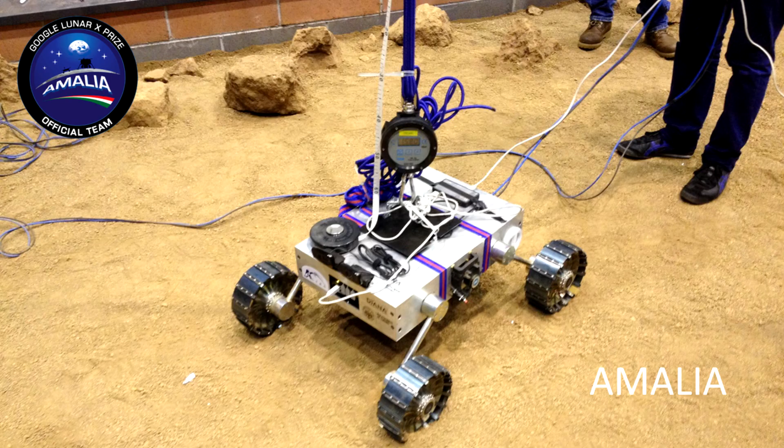So this is a photo of us about 1 month ago in Poland. Up to today, we have completed a total of 4 rovers. The first was Amalia, created for the Google Lunar X Prize - a small lunar scout equipped with a stereo camera just for mapping and taking photos of the moon soil. The project was actually space grade, so the rover cost quite a lot, and there were other sponsors like the Italian Space Agency, Leonardo, and others. It was a good project for the team to start with.

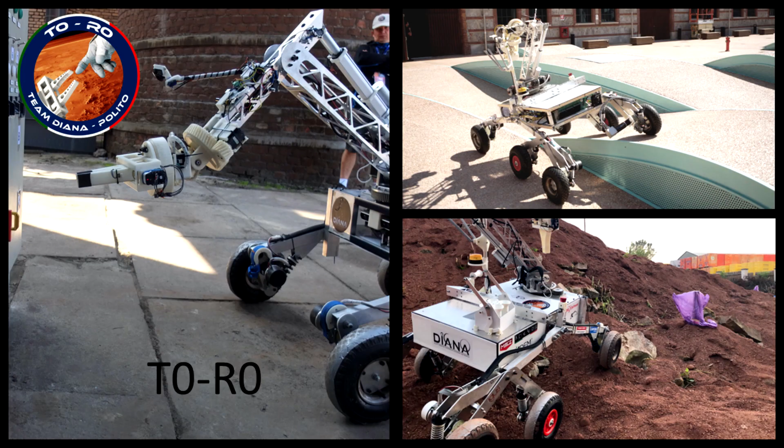But after the failure of the Google Lunar X Prize competition, because Google ceased to continue it, we started developing a rover for Martian environments in order to participate in the European Rover Challenge and the Rover Challenge series. So in 2016, we started the Toro project, and this rover was equipped with a 6 degrees of freedom arm - we have one mounted there, not that exact arm, but another 6 degrees of freedom arm.

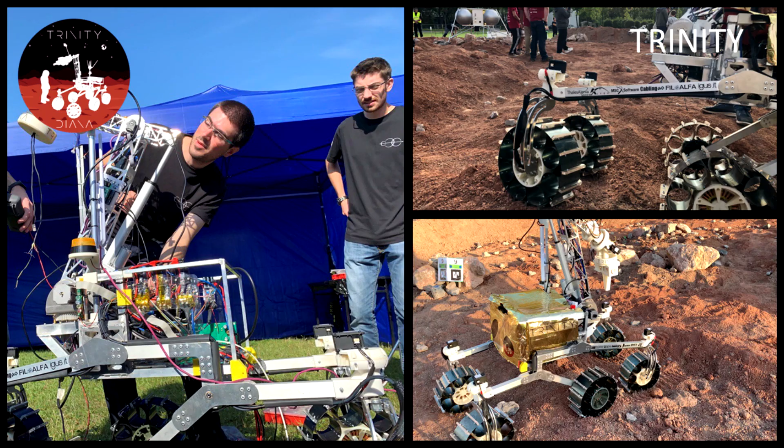This rover was then presented at the 2018 European Rover Challenge. After that, trying to solve the problems of Toro, mainly its steering capabilities, we designed Trinity, our second Martian rover. Trinity had steering wheels and a lot of improvements, but the project was too quick. So just as we came back from Poland that year in 2019, we started thinking about a new version of Trinity, but the differences were so significant that we decided to give it another name.

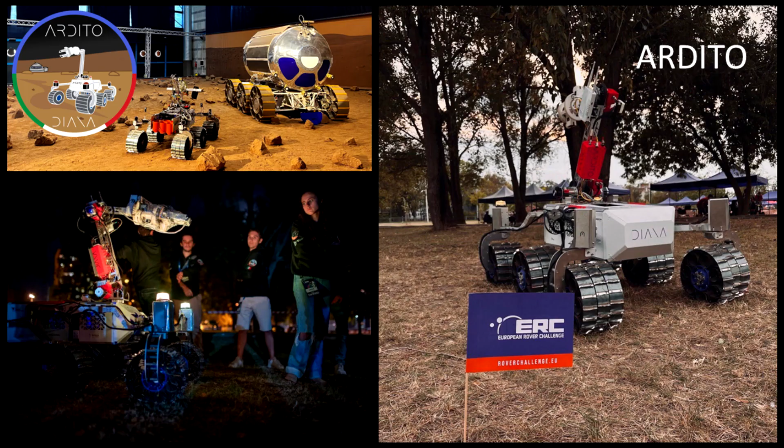So Ardito was born after that. Ardito improves on the Trinity concept, enhancing the locomotion capability and the manipulation capability with a brand new 6 degrees of freedom arm. This project started in 2019, and we are still developing it and pushing the rover forward. So that's a short recap of our history.

So the media design group, for graphics, social media and video editing, because we have to deliver a video for our competitions. The science research group deals with the scientific tasks inside the competition, which Alessandro will explain a bit more later, and Alessio again a bit more. And the management group deals with procurement, keeping track of the work inside the rover and inside the groups and the transversal group - it's like glue inside the team, we hope.

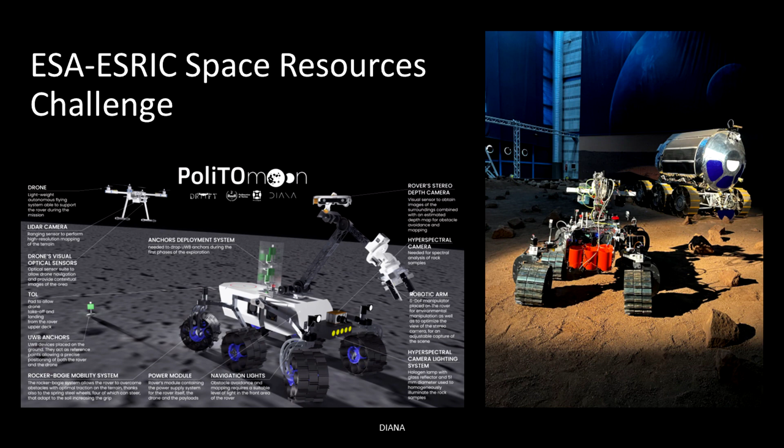Then, of course, a space-grade rover is one thing, and an Earth-based competition rover is another. In general, we try to be in the middle - not too easy, not too expensive, so to say.

And then, as a student team of Politecnico, we also take part in several public events with the goal of promoting our activities, but also the university, and more in general engineering, to do STEM and stuff like that.

And then also, as I said, television events - we were mentioned, and some of us were recorded during an event of Super Quark.

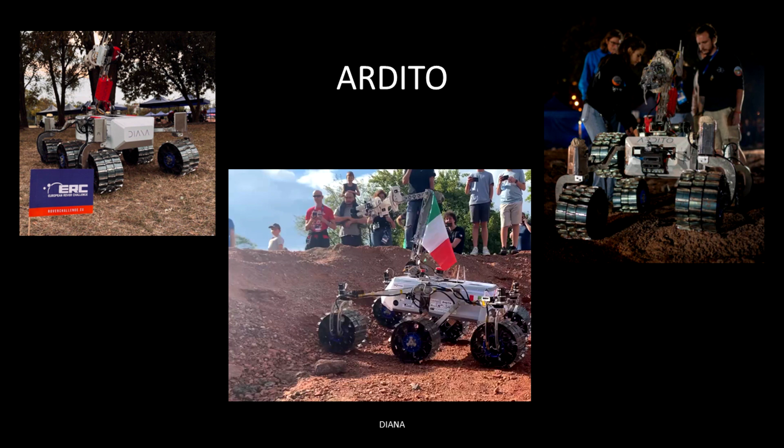Hi everybody, we are Amalia, Mattia and Lorenzo. Me and Lorenzo will be the mechanical leaders for this year. Here you can see our last rover, Ardito. The mechanical department is one of the most numerous in the team, and welcomes students mainly from aerospace and mechanical engineering, but over the years even students from civil, geotechnical and biomedical engineering have been active members.

So any industrial or even material student interested in robotics is welcome in the department.

Now let's talk about our last project, the rover Ardito. It's a robotic platform designed to be modular so it can be adapted to various mission scenarios and future applications. In this slide you can see different mission configurations: on the left, the rover is hosting the UWB payloads for the ESRIC competition, and on the right we have the deep sampling system for the collection task.

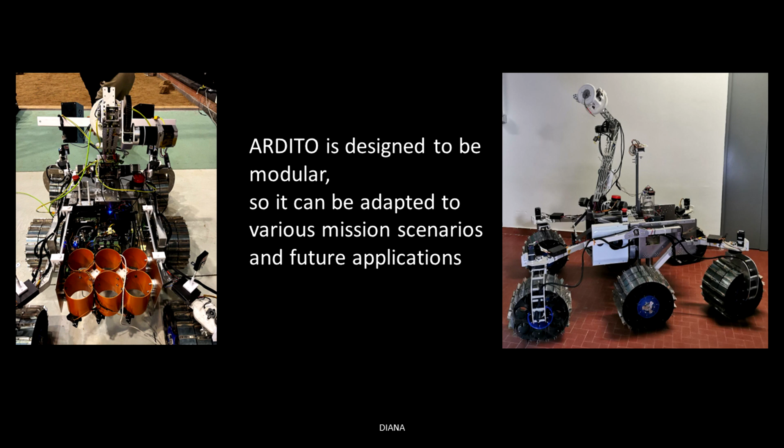The locomotion structure of the rover consists of a rocker bogie terrain mobility system equipped with 6 independent driven wheels, 4 of which are capable of steering. The wheels are made of spring steel so they can adapt to irregular terrain.

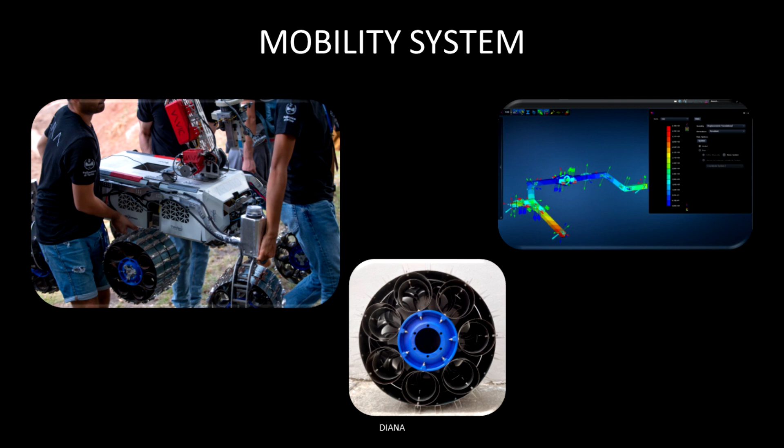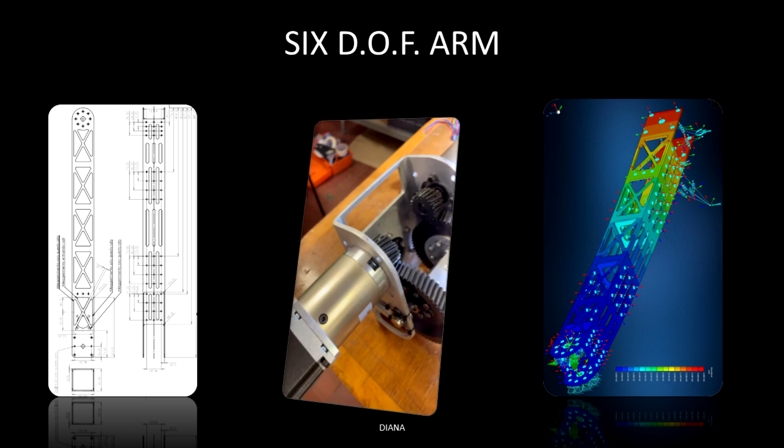The design follows a custom geometry defined using various modeling softwares, adapted to the mission scenarios. The 6 degrees of freedom arm can be extended either in a high position or close to the ground. You can see the assembling part here, and we have a short video of the arm fully assembled.

It can be mainly divided into 2 parts, the structural arm and the wrist. The arm, as you can see in the video, is also equipped with internal ribs connected to the structure with rivets that prevent deformation at the weak points.

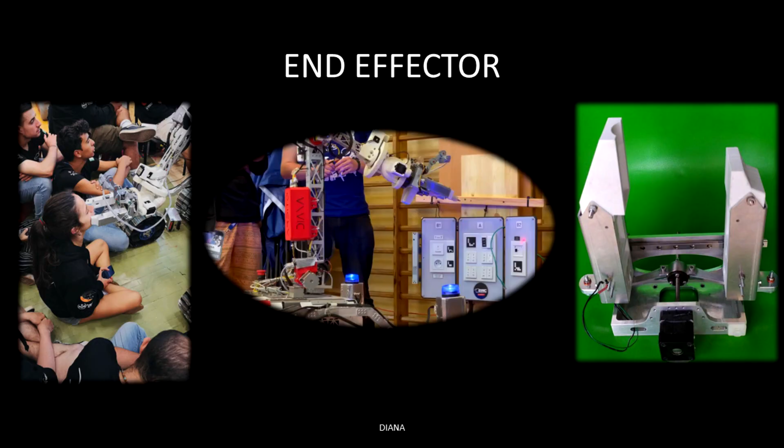The end effector that is on top of the robotic arm is the hand that we use to execute the maintenance task.

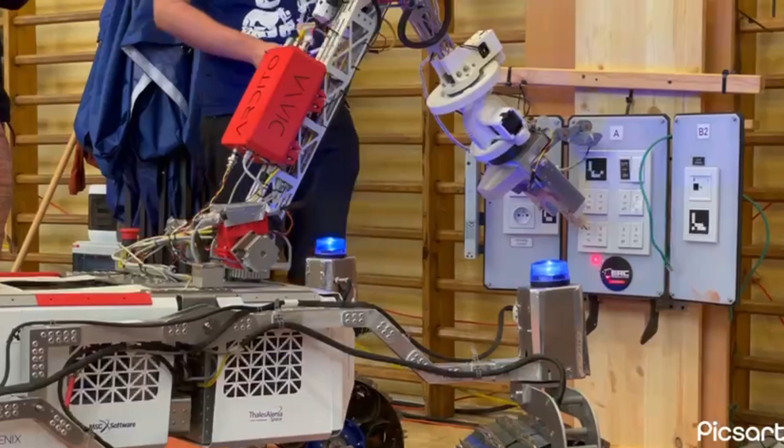The end effector is also designed to be modular, and because of the difficulty in creating such a performing system, different fingertips were made to accomplish each subtask. In total you can see on the right 2 fingertips made for the maintenance and probing tasks. Now I leave the microphone to Lorenzo.

Talking about modularity, as Amalia said, Ardito can be equipped with different systems, such as a deep sampling system, and also the power and avionics module can be changed to let all these payloads fit on the Ardito structure.

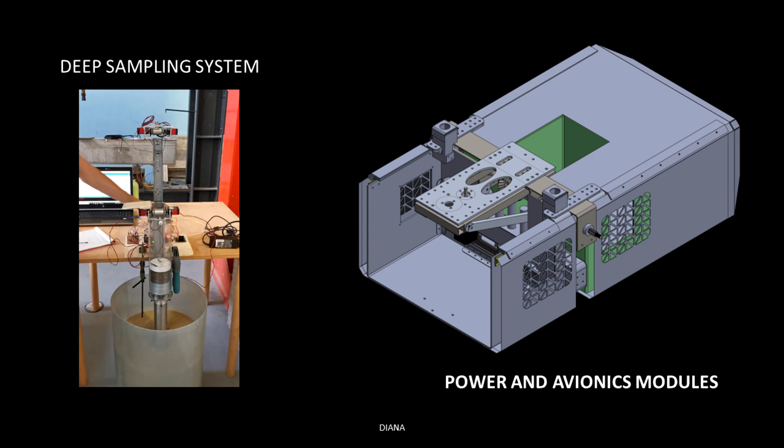Here we have the differential system. This is the actual differential, and this is the future one, placed under the chassis to connect the 2 mobility systems. It's formed by 4 straight bevel gears and 2 spline shafts, and it lets Ardito move.

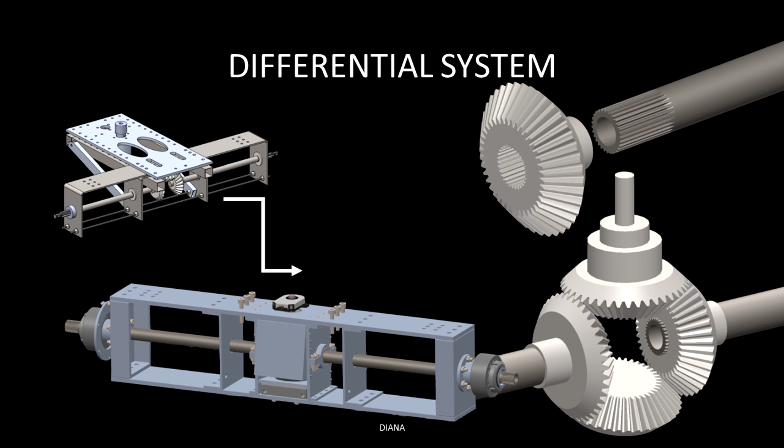Also, during the year we have a production phase, where we do the production sheets and communicate with the companies that will produce our pieces.

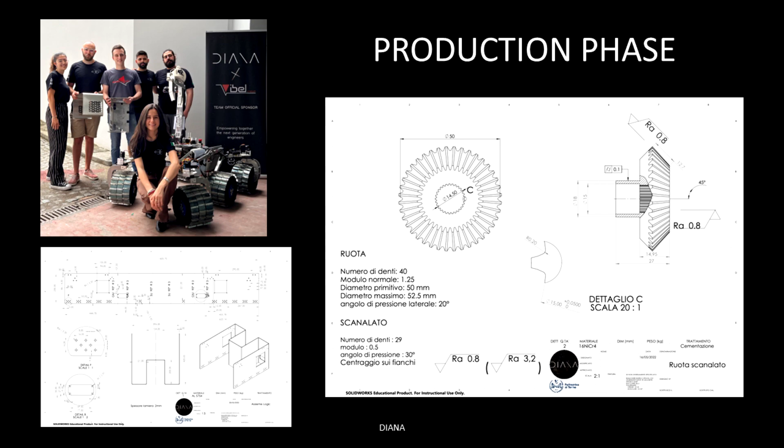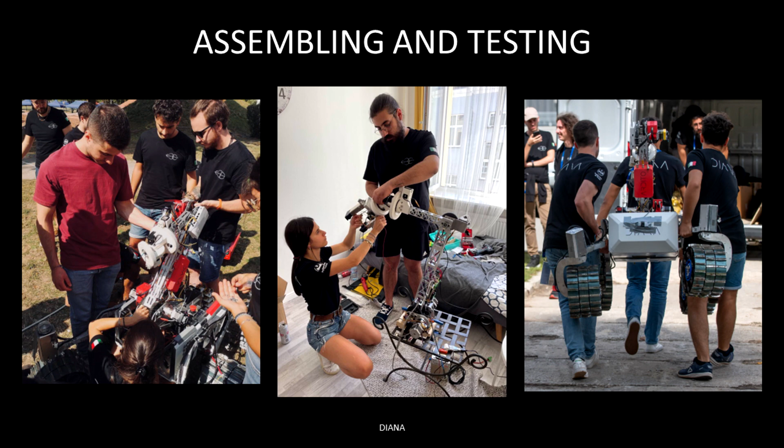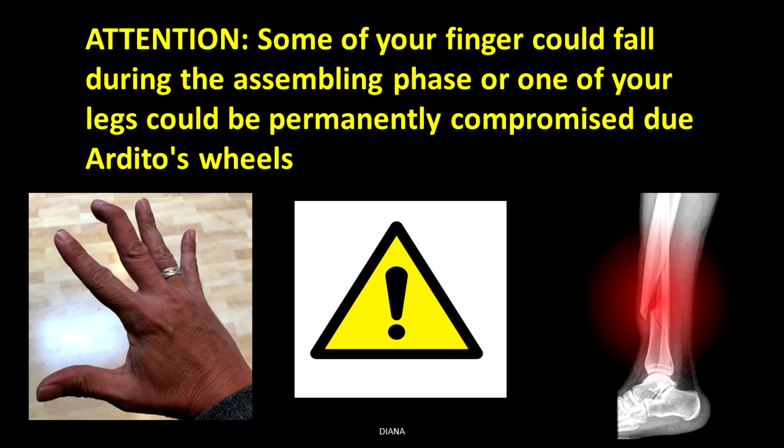Hello everyone, so now I'm going to give you a brief introduction to our two transversal groups. We have basically two of them: the analysis group and the CAD division.

Using MSC software like Nastran, Apex, and ADAMS, all of them from MSC company, because we really love them. The analysis division has a lot of color, but that's all.

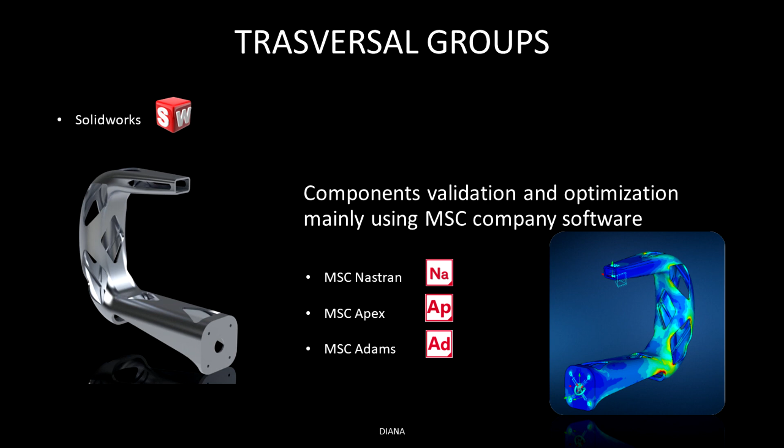And then with the multi-body analysis, we can create... okay, this is the video.

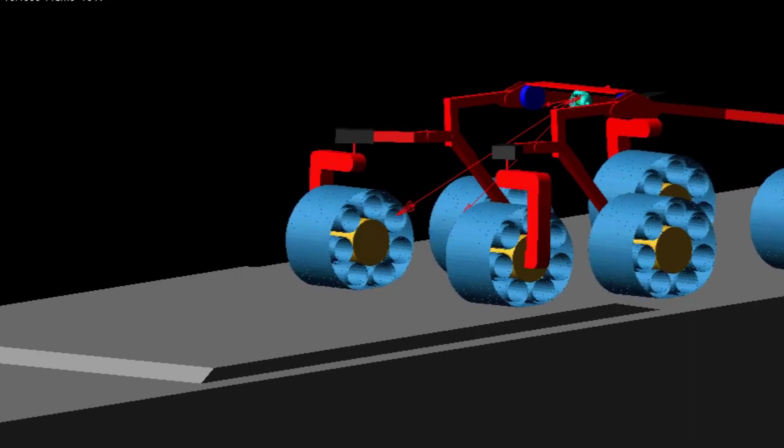It's really helpful to us to understand better the physical setup, the physical environment where the rover acts, and understand better the forces, the moments, everything about the physical environment that you have to take into consideration also for the dynamic analysis and other analyses.

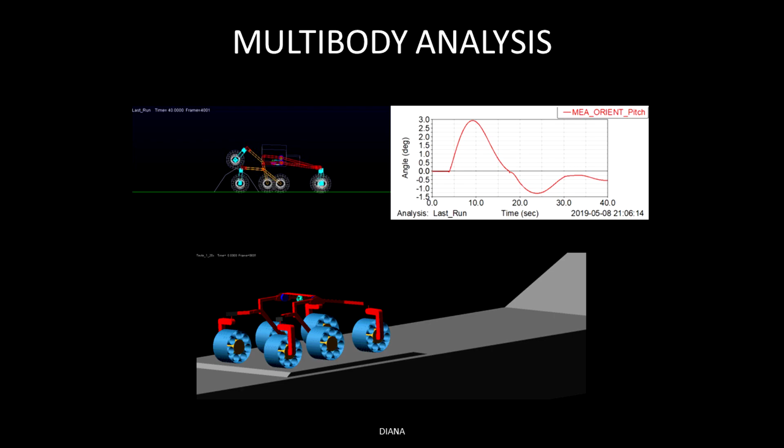So the base of this part is that we have to create components that we can use for the rover. We can start from a concept on SolidWorks, try to get some shape, and then you have to validate with Apex, doing a continuous iteration between the CAD software and the analysis software, to create a final model and final results to give to the production phase and send to the company to produce them.

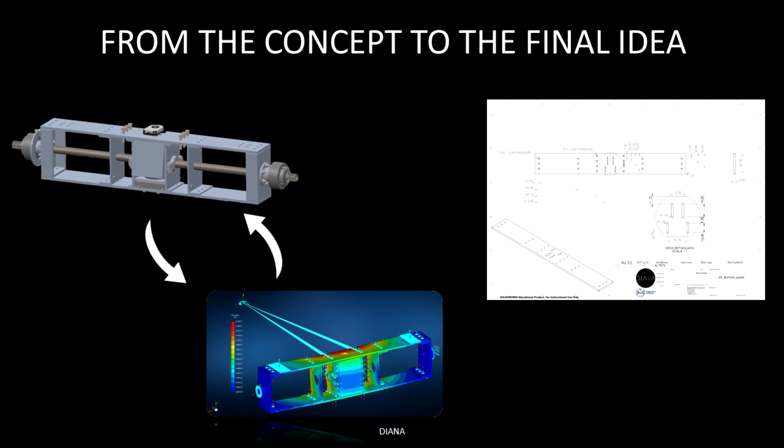So basically this is a brief introduction, and I'm going to leave the speech to the electronics division.

Can you hear me? Okay. Now we will speak about electronics. I'm Giacomo, the co-leader of the electronics department, and I work on the hardware part of the electronics.

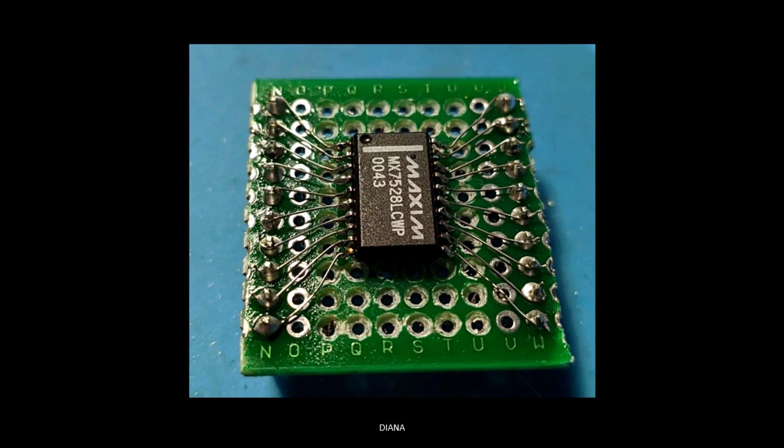One of the biggest parts of our work is the PCB design and production, because almost all the PCBs are made by us. The first part of the PCB production is the hardware design and development. We use software like KiCad and EasyEDA, and probably this year we would like to start using Altium thanks to the student license provided by the Politecnico.

These are, for example, two boards, the schematics of two boards that are mounted on the rover.

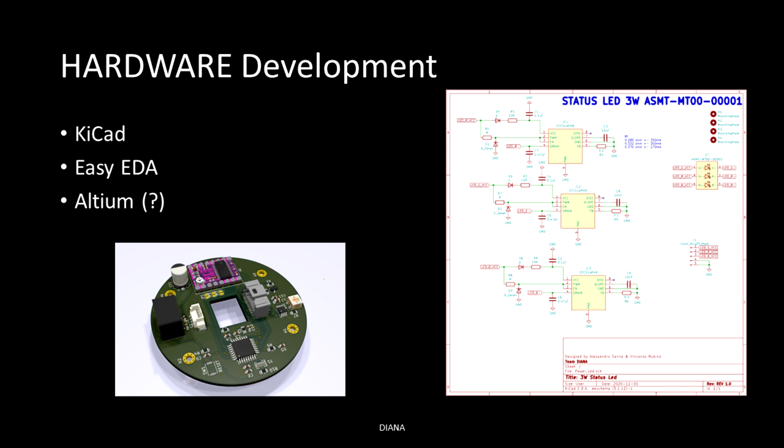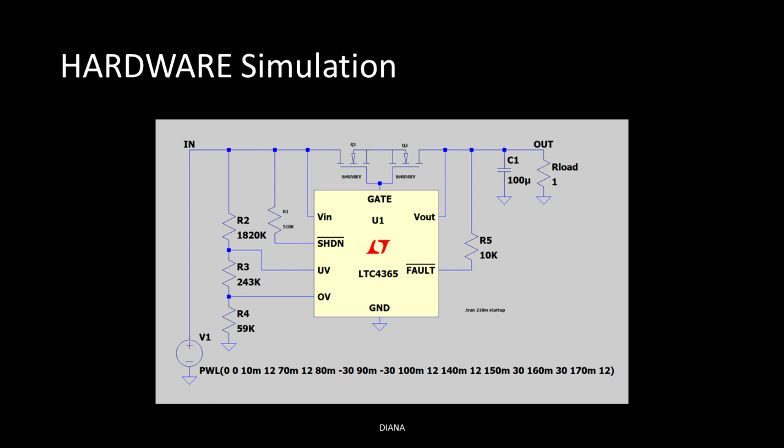Some PCBs need testing before production, and to do this we use software like Spice to test them before sending them to production.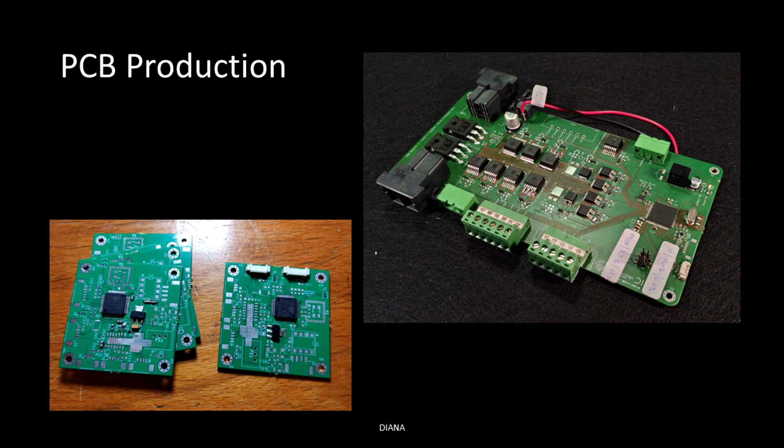The last part is the effective production and assembly, and we do this in the lab. These are other boards that are mounted on the rover. This one, for example, is mounted on the steering, and the other one is the power control board that controls the power from the battery to the rover.

Another work that we do is the cable management. This, for example, is the junction box, a box full of cables that is mounted on the rover and gives modularity because it's full of connectors that can be connected, so we can detach all the electronics from the rover.

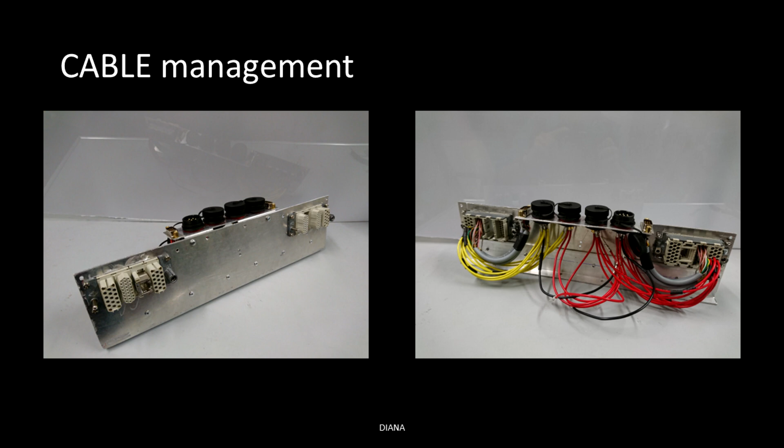Now I will give space to Nicola, who will speak about firmware. Hello everyone, I'm Nicola, I'm the co-lead of electronics and I work on the firmware.

The firmware department deals with writing the code for various ARM microcontrollers, either bare metal or using real-time operating systems. Right now we are working mainly on STM boards from ST Microelectronics, and the two boards we have on Ardito are based on H7s and F4s.

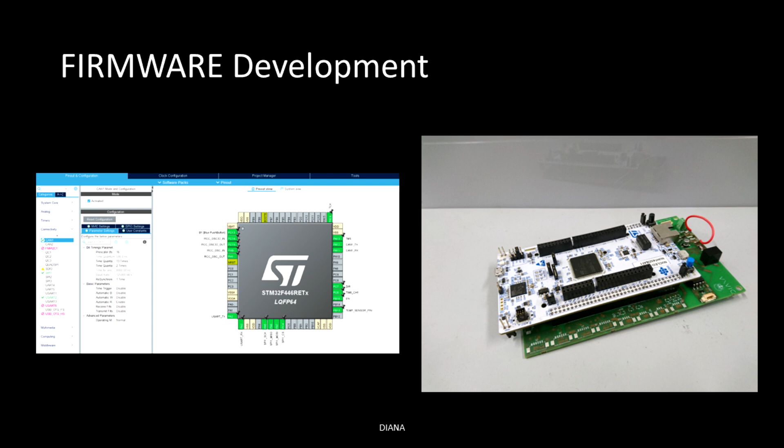For the coding part, we use mainly Visual Studio Code and the tools provided by ST to generate the board support packages. From firmware, we also deal with the communication between the boards.

At the moment we're using Ethernet and lightweight IP to communicate between the high level and the low level, so the main onboard computer and the various control units, for power, mobility, and the arm.

Inside the subsystem we use the CAN bus, and also communication methods like I2C, UART, or SPI for the boards.

For next year, given the non-predictability of the lightweight IP, we would like to accomplish a more challenging task, so we want to complete a new communication system as a backup in case we have problems with Wi-Fi. This communication will be custom made, and here's a schematic of what we would like to do.

So a transceiver on the base station side, from where we communicate with the rover, and one on the rover side. Both of them should have F4 or H7 microcontrollers, which communicate with an RF transceiver that sends the messages.

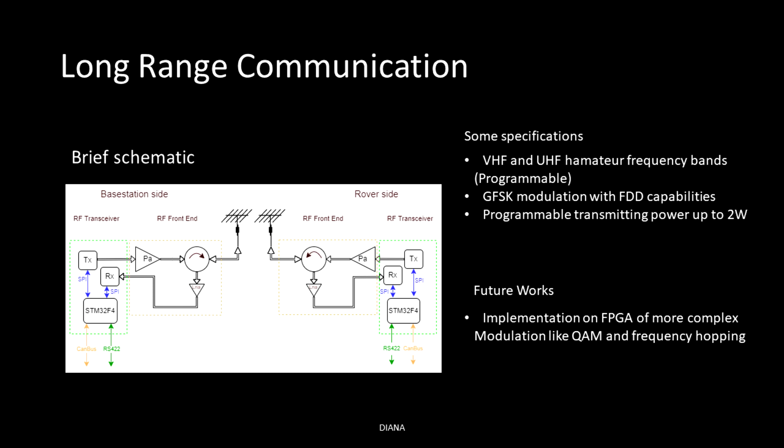For what we have to do in the next months, on the hardware side: design new versions of the current boards, and mainly develop the PDU, which is currently not really working, and testing.

On the firmware side, rewrite the code for the steppers, all of them, to make them smoother. Improve the code, all the firmware based on real-time operating systems, to standardize them.

Maybe switch to an operating system that gives us a real standard from the IEEE, like RTEMS, and switch from the CAN bus to the time-triggered CAN bus. And from the cable and harness side, it's just rewiring everything again.

Now I give the word to the computer science department, so Thomas.

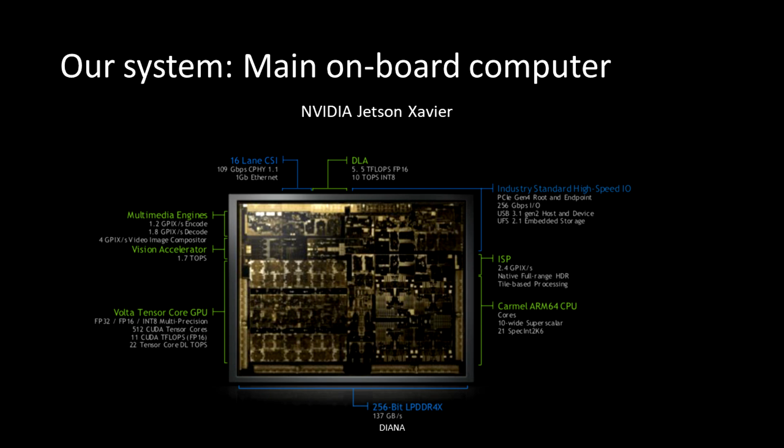Then the second area is what we call the ground segment. This area is more focused on the human-machine interface. So how do we interface with the rover? How do we move it? We do this mainly on a web app, which you shouldn't picture as typing www.rover.com, but as a standalone web app that runs on the computer that controls the rover, but also on a tablet or on a smartphone.

The people that work more on this area use JavaScript to develop this web app. We use Vue and the Quasar framework. Also the communication, but this is for all the rover, is based on MQTT. So by joining this area, the experience is more based on web development.

More on web interfaces, but also in some sense on ergonomy. Also this year we will start to develop physical controllers to control the web app, so maybe who will work there will have the possibility to develop actual hardware controllers, or at least to design it.

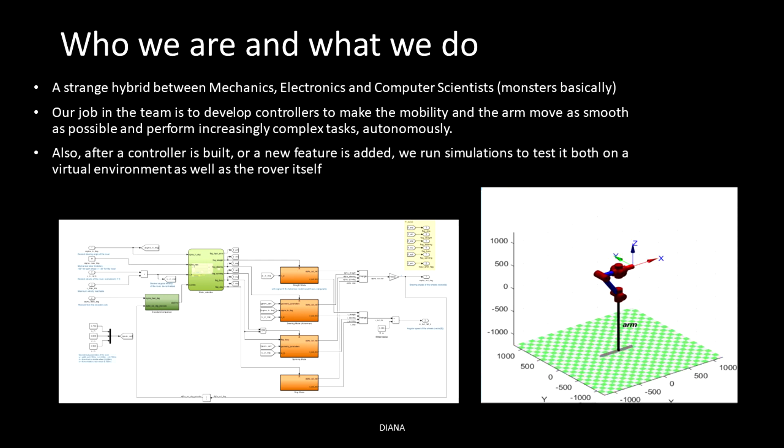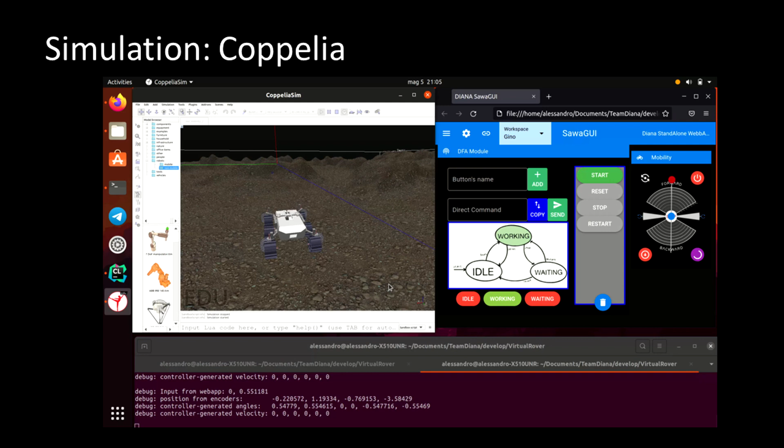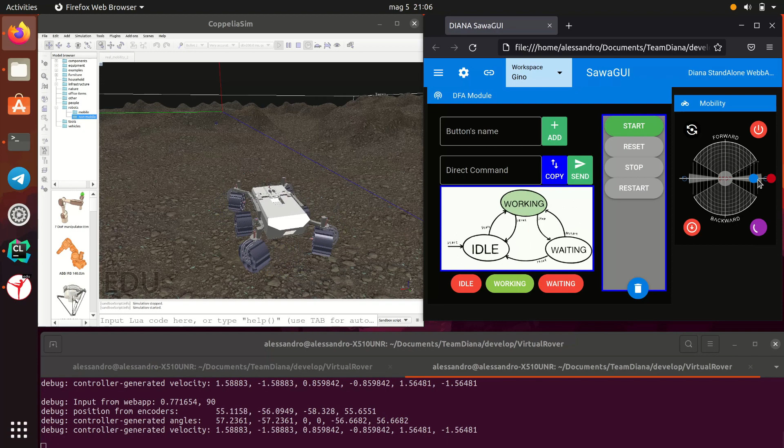Here there is a simulation that I will try to show you. So here you can see just the mobility on a terrain that we designed, and on the right part of the slide you can see the web app of the velocity controller. Here it's spinning and doing some very cool stuff, and here there's position and feedback that we are getting from the mobility.

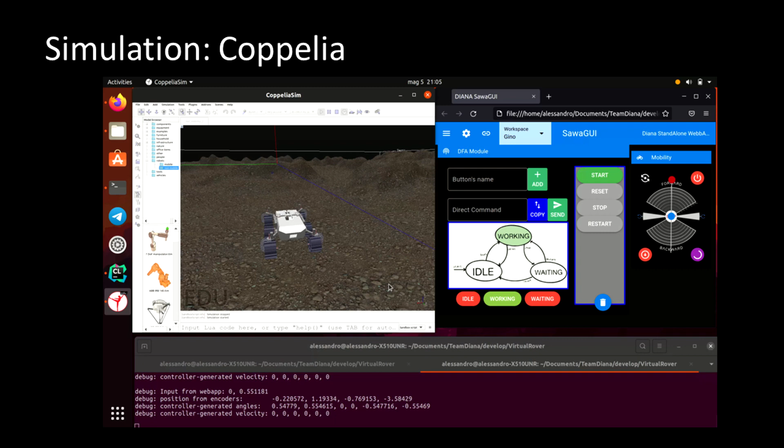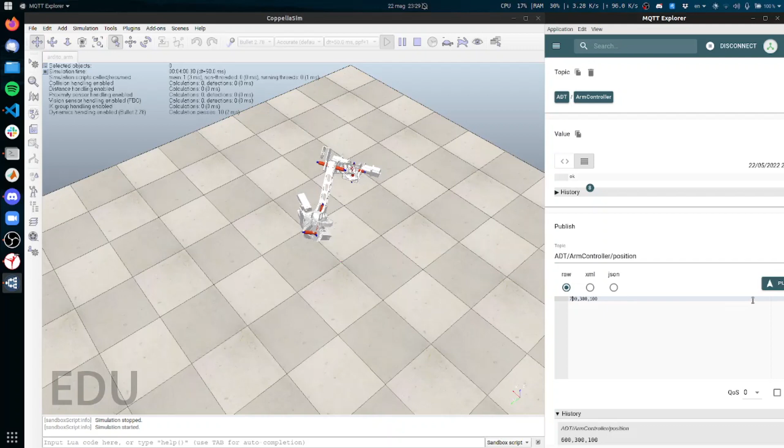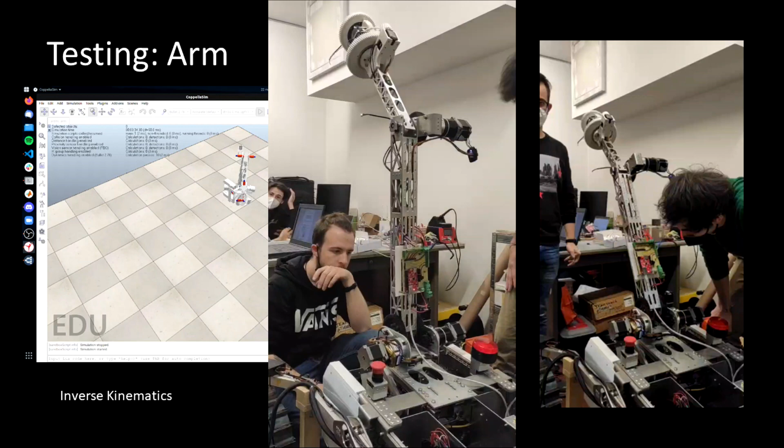So here for the arm, same thing. First we do the simulation using also Coppelia, and using also MQTT, which you can see there. The second video is just testing joints on the arm. Here, basically, they are writing what the arm has to do, and then the arm is doing it.

This was a very important moment of this year, because basically what happens sometimes is that you are not able to test stuff, so it's very difficult and painful. So we were in Poland, and the position controller is actually the controller that we developed this year, like Thomas was saying. Basically we gave the rover a target and it has to reach it. We tested the position controller during the competition, the night before, and this was how - we never tested it, obviously - but this was how it went.

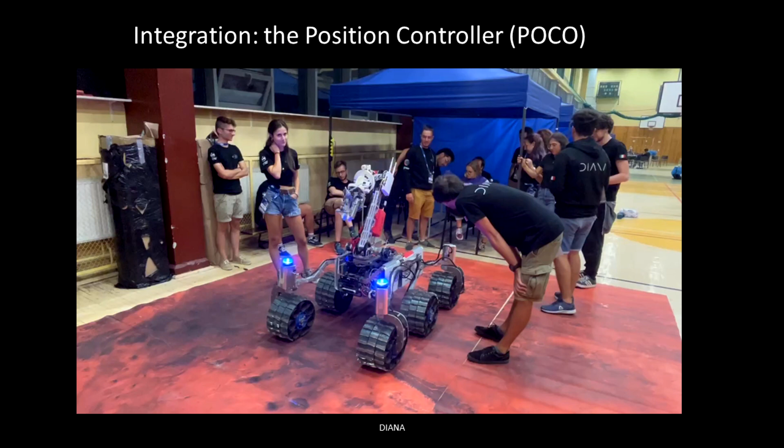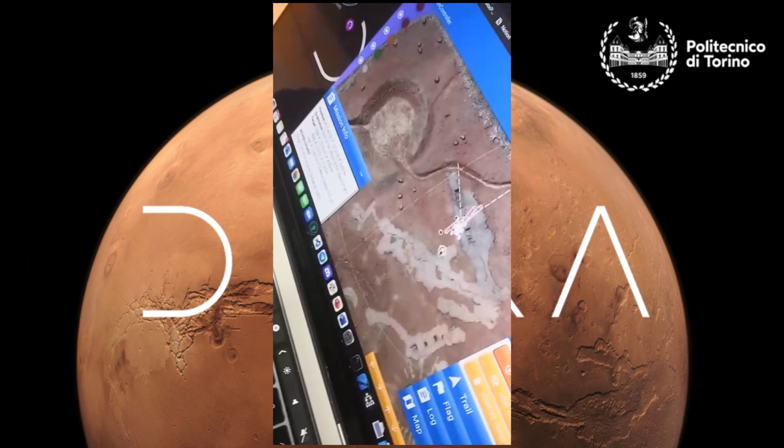Very briefly I wanted to add something about this integration phase. We have another video of one of these events - I cannot, okay. So this is one other point of view of another use of this position controller.

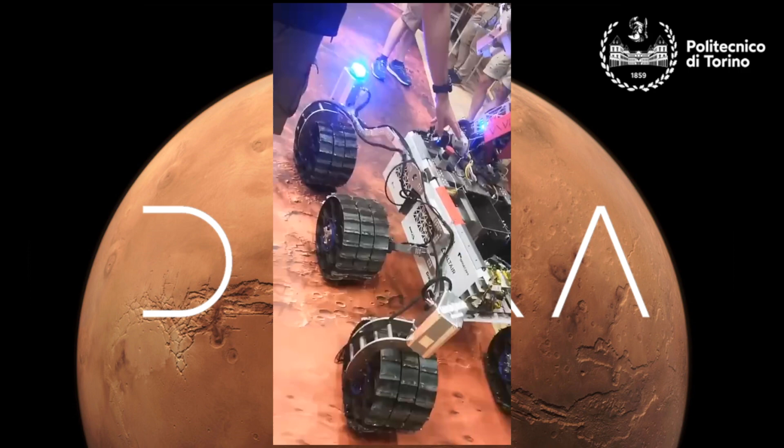There was the work from mechatronics people who developed a model, general computer science people who developed the infrastructure to take position from the stereo cameras and also handle different autonomy systems, and also the work from the people who developed the web app, where we could actually give the rover the coordinates.

If you join our department, you can be part of something like this, maybe more autonomous. This is a little list of the skills we are looking for. Knowing how to code, knowing how to develop is important, but it's not everything.

It's surely appreciated, but even if you are not good at writing code or developing, if you are passionate about aerospace, robotics, or computer science in general, don't be scared to apply, since you will be part of a group of people that will teach you how to do stuff. That's it, thanks.

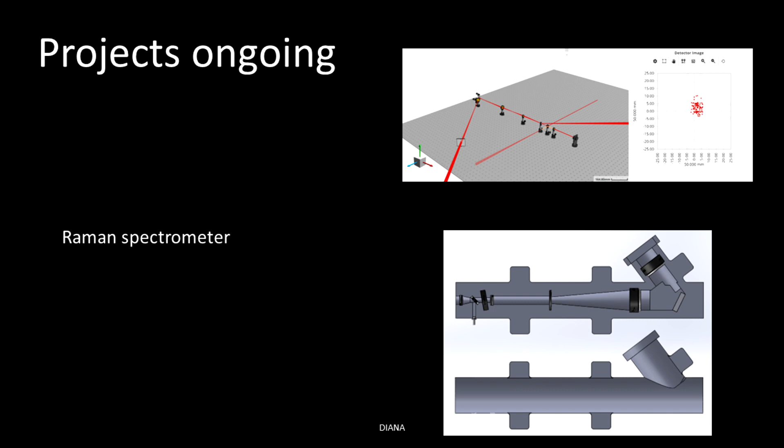This system right here is in the mid phase. We have a lot done, but everything needs to be more tested and brought together.

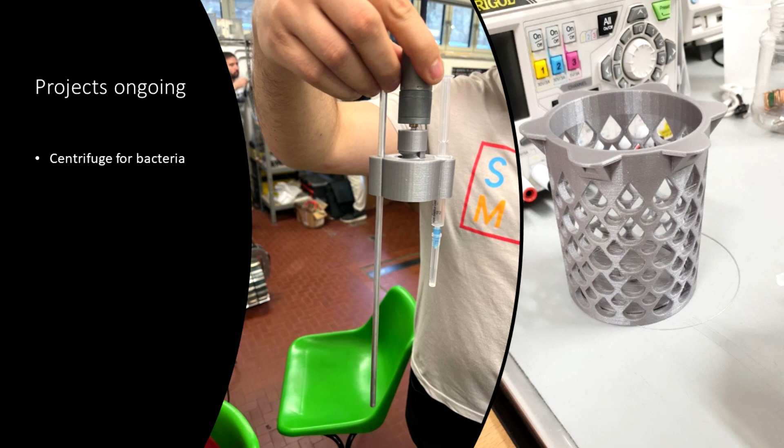The last one is the ERC Science task, the third one I talked about, because you have to do this geological map. None of us has a geological background, so we have to learn everything in a week, go there, take some photos of random objects in the yard and on its wall, and test a theory we created before.

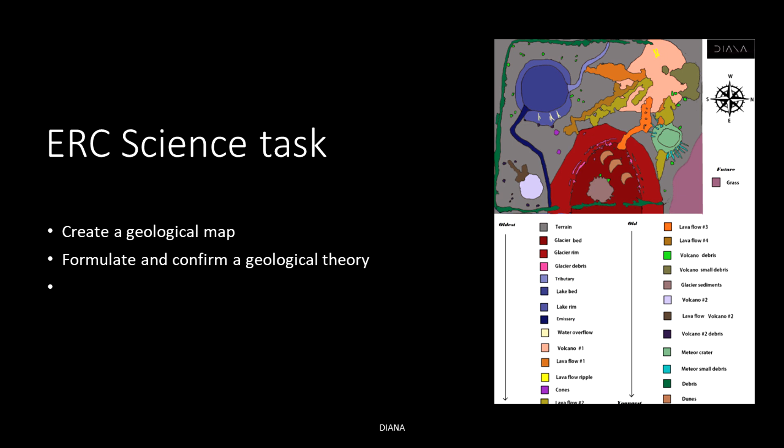So who are we looking for? People that don't want to work only on electronics, only mechanical, or only computer science. People that want to work on a whole system, because everything you see is basically electromechanical. You have to code it, etc. And we take people from any kind of engineering, as you saw from the list I did at the start.

And if anyone has a passion about Mars geology, please join. And that's it.

So now I'll talk about two semi-transversal groups that are going to be in the team, and that essentially support the team's activity in ways that are related to the project, not strictly technical, but in some ways essential to the realization of everything. The first one is the management group, which is semi-transversal because it's made of both people who work specifically for this group, but also people who work in other departments and groups can contribute to it.

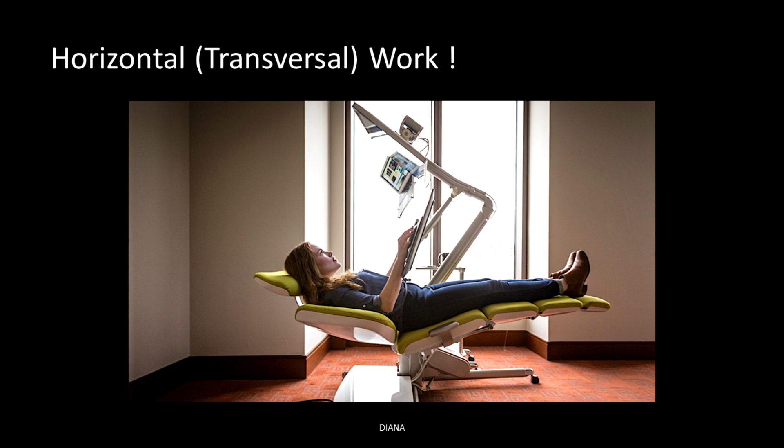There are a lot of things about mechanics, computer science, and electronics that have to work together. So we set up transversal groups and horizontal work, because you have to imagine the team as a matrix: the columns are the departments, and the rows are the special purpose groups, horizontal groups, and transversal groups.